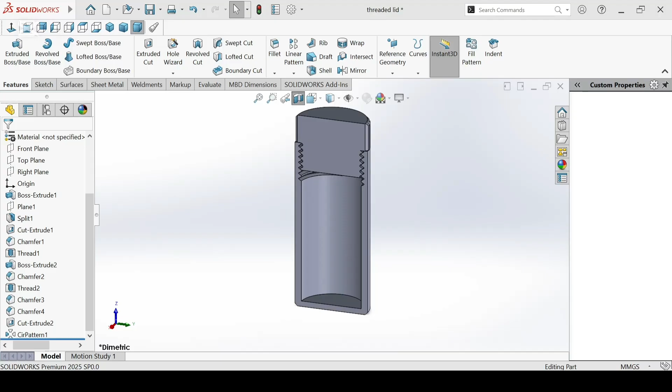In this video, I'm going to take you through a step-by-step process where we're going to design a very simple storage compartment which is cylindrical and it has a lid which you can fasten. So join me as we're going to learn a few things in SolidWorks.

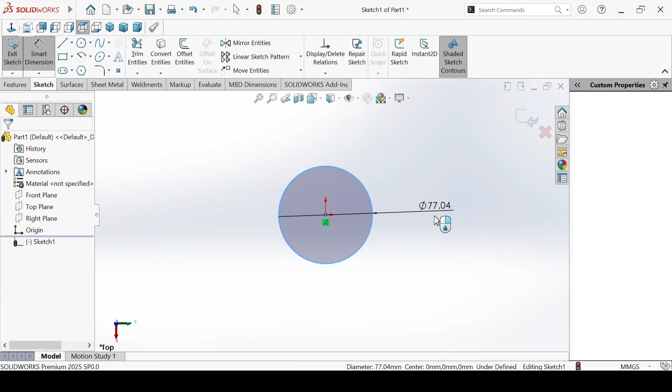So we're going to open a new part and then go to the top plane and start a sketch. Go to the circle tool. Let's make a circle and dimension it 30 millimeters. And then we're going to use extruded boss. I'm going to extrude it for 60 millimeters. Click OK.

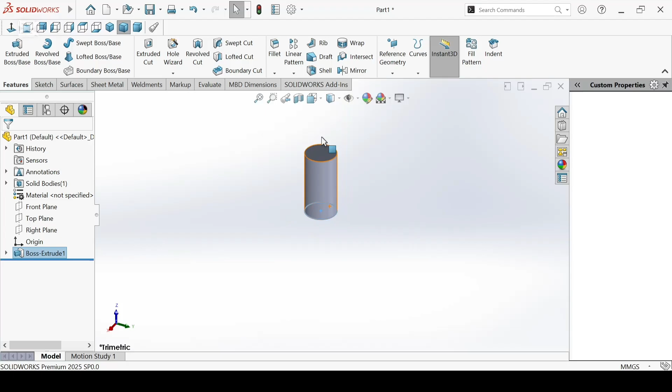And then we're going to go to the reference geometry tab. Select a plane. We're going to make a plane with the topmost part of the cylinder that we just created, 10 millimeters. Flip the offset and then click OK.

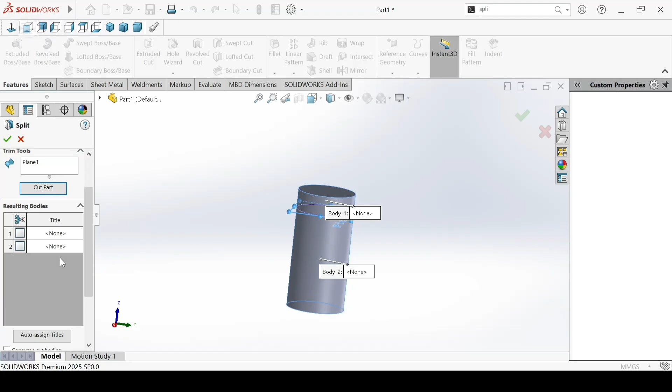So the next step is using this plane to split the cylinder into two parts, the lid and the base compartment. So we're going to use the split feature. Let's go to the command tab, start typing split, and the trim tool is going to be the plane that we just created, and then just click on cut part and then check the two parts that have been created, and without doing any other thing click OK.

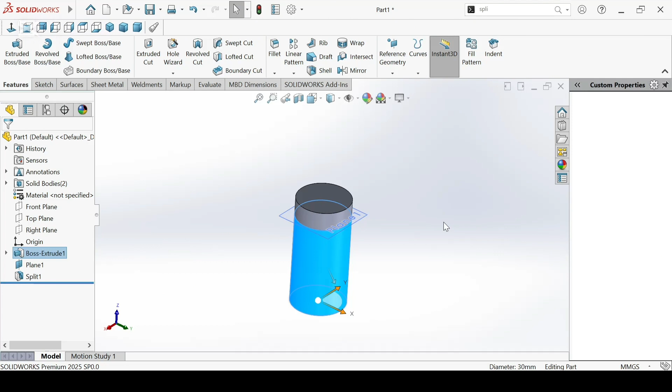So as you can see, we have now two solids. So from here you're going to select the lower solid, right click and then isolate. I'm going to select the top part of the solid, start a sketch, have a circle, and we're going to dimension this circle 23 millimeters.

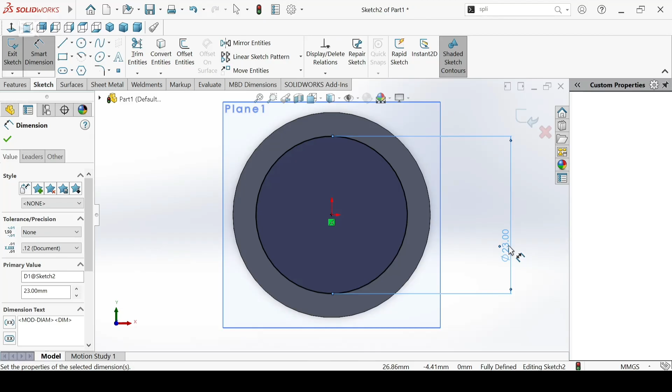So the reason why I've taken 23 millimeters, we are going to use a thread of M24, metric 24, and the drill size for the metric 24 is 22 millimeters. However, we want some allowance for the threads, for the top and the bottom part to fit. So that's why I've taken 23 millimeters.

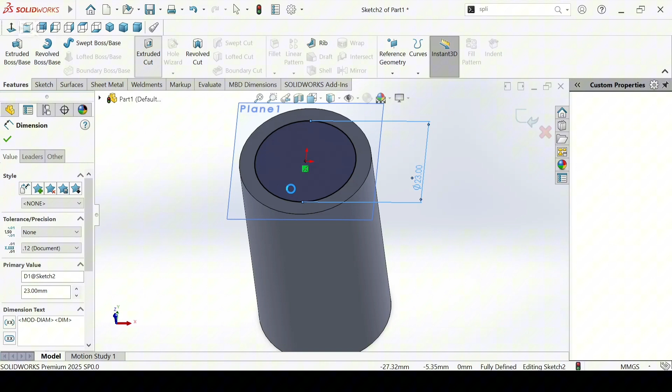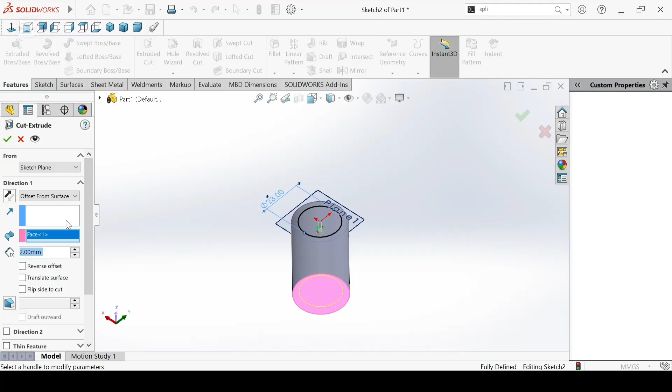So we're going to use this circle and extrude cut it. But for direction 1, we're going to say offset from surface, and the surface that we're going to offset from is this lower surface. Then we're going to offset it 2 millimeters from that surface, and then click OK.

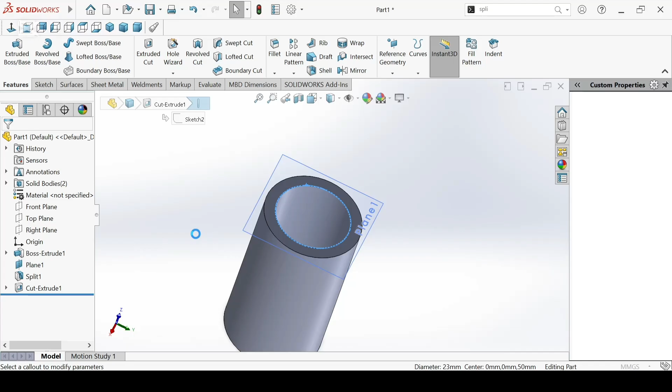So from here we're going to take this top edge and we're going to chamfer it. We're going to give it a chamfer of 0.5 millimeters. And click OK.

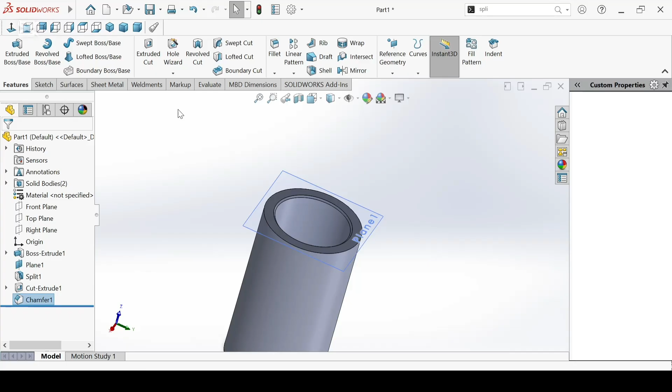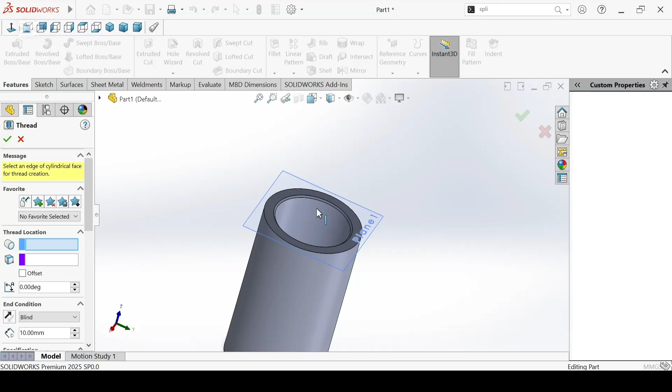So the next part, we're going to make some threads, the M24 threads that we talked about. Go to the hole wizard and then select thread from the drop down menu. So for the first selection, we're going to take that edge, the one at the bottom of the chamfer, and then where we want it to start from, we're going to take the top part of the cylinder.

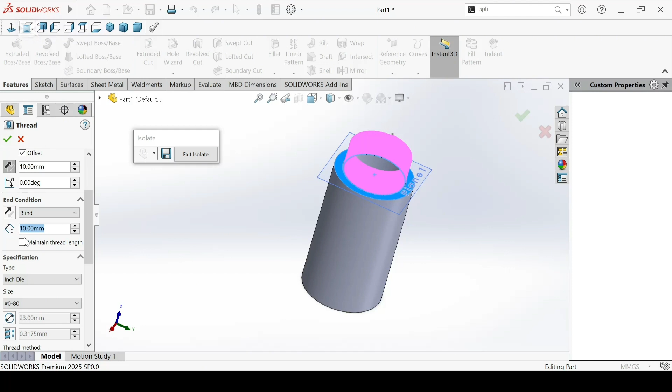So after that, we are going to click on offset because we want the thread to cut all through the cylinder from the top, and then let's just put 10 millimeters and then offset it, so we want it to cut from the top. And then end condition of the thread here, we're going to give it 18 millimeters, and then we're going to use the metric tap. So for the hole we're going to use the tap, and for the plug we're going to use the die.

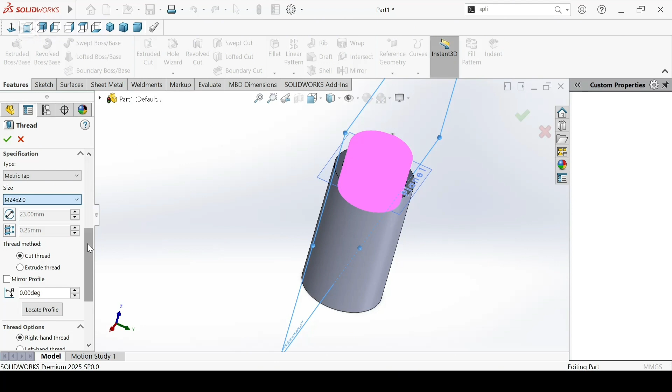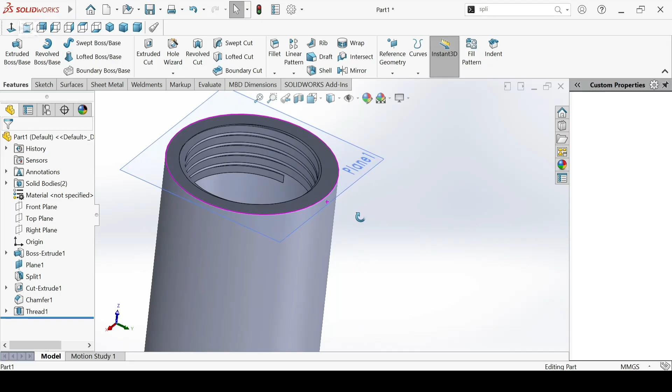So the size, we'll use M24 by 2 millimeters. And then on the thread option you can say trim with the start face. Then we click OK. And as simple as that, we've created some threads. We've cut some threads onto which we can fasten the lid.

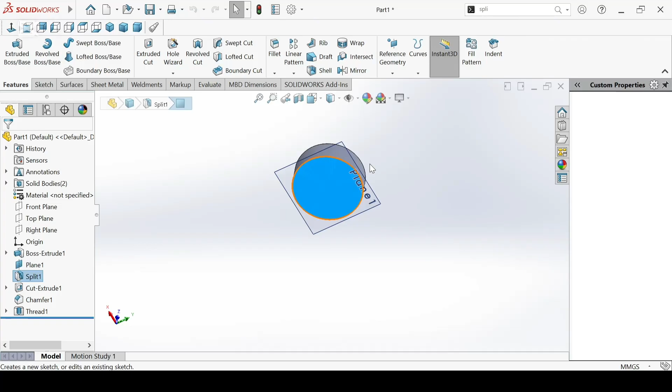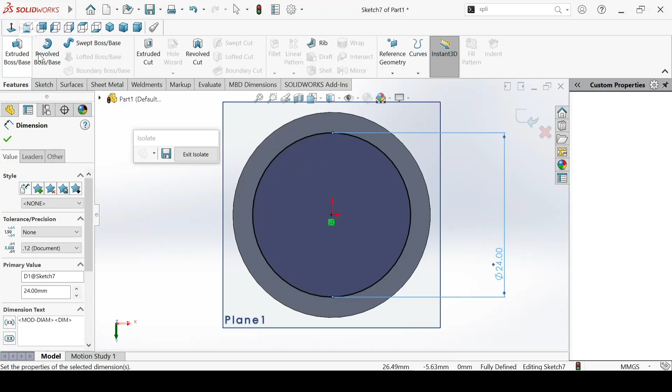So we exit the isolate, and then now we select the top lid and then isolate it. So from here we're going to take that face, and then we're going to make a circle of 24 millimeters diameter. That's 24 millimeters. Then we're going to use the boss extrude and extrude it 10 millimeters.

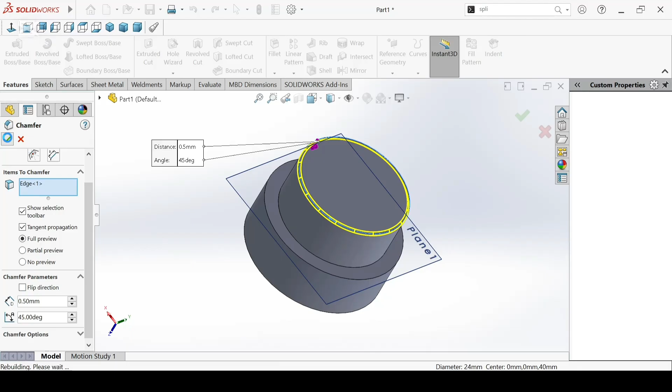Click OK. So we're going to do the same thing where we're going to make the threads, but now on this plug that we just extruded. So we use the chamfer. If you have a chamfer, it aids in the entry of the threads, and it also helps in self-aligning. So as usual, 0.5 millimeters, that's enough.

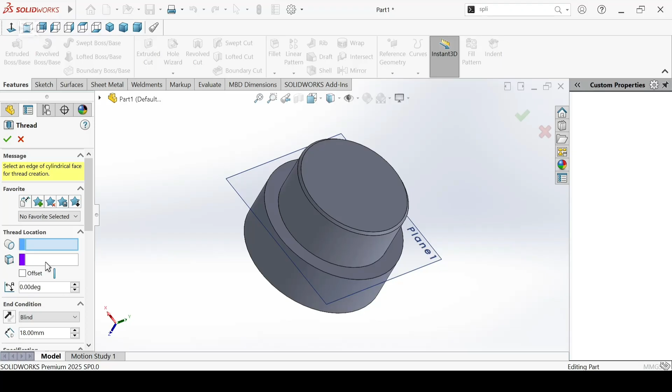Now we go to the drop down menu under the hole wizard, select on thread, then select the bottom part of the chamfer as we did before, and for the start face, select the topmost part. We have an offset of 10 millimeters. Change the direction, and for the end condition use up to selection, and that will be this face here.

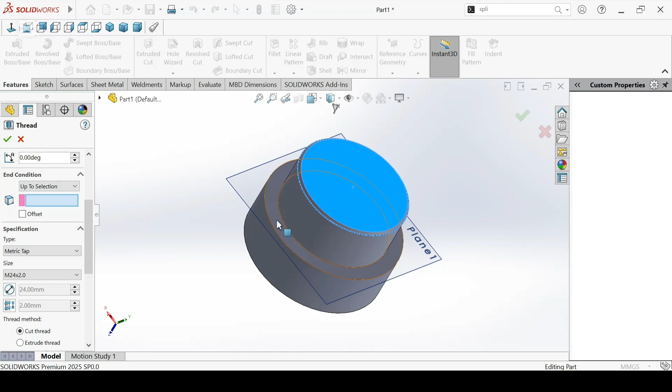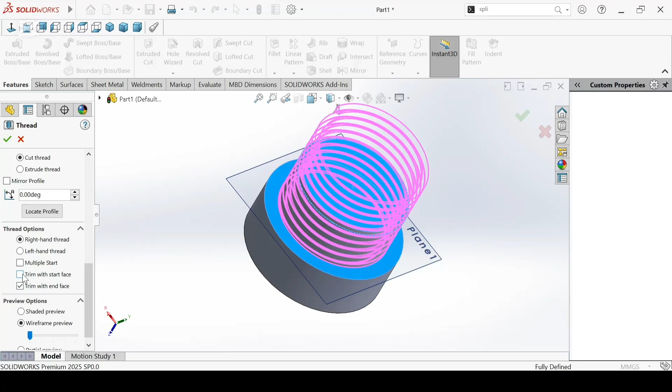And since this one is a plug, we're going to use a metric die. Ensure it's still cut thread. Then we can trim with the end face and the start face, so that we have a neat model right there. After that we click on OK.

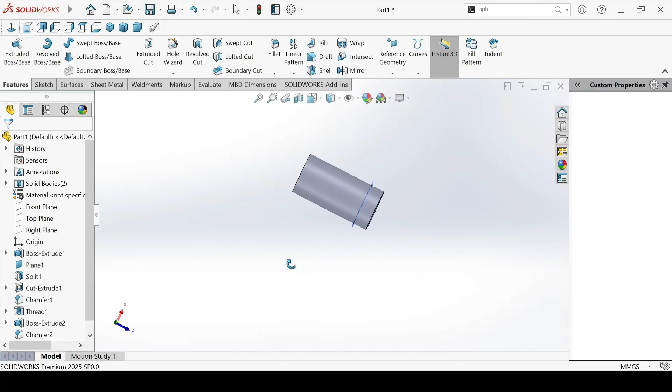If we exit our sketch, you can see we have our container. And if we have a section view using the right plane, you can see that we've made a very good cylinder which has a lid and a base.

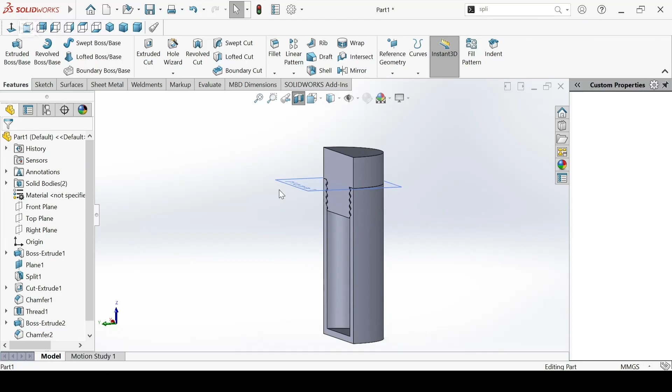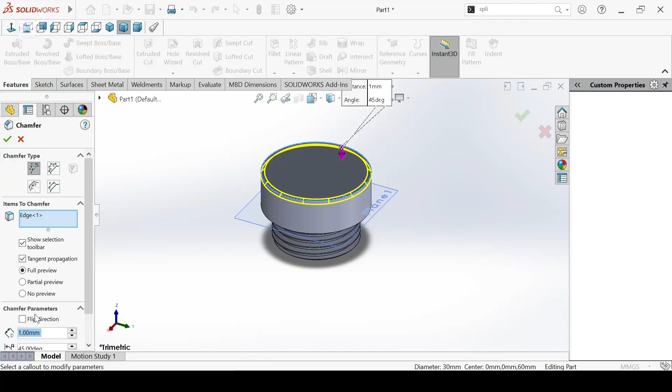So all that remains is giving the top lid some friction surface where you can use it to screw it in or out. So we can isolate the top lid. First of all, we give it an aesthetic chamfer. This time around, make sure the chamfer is 1 millimeter. Click on OK, and then we're going to use the top face of that lid.

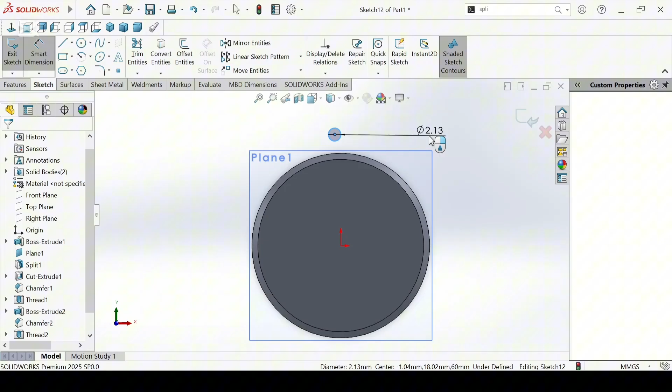Start a sketch on it, select the circle tool, make a circle and dimension it 2 millimeters. Then we're going to take this circle's center point and make it coincident with the outermost circle, rather the edge. And then take the center point of the circle and the origin point and ensure they're vertical.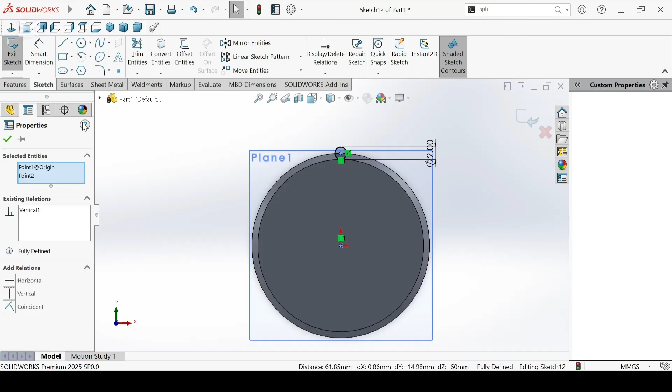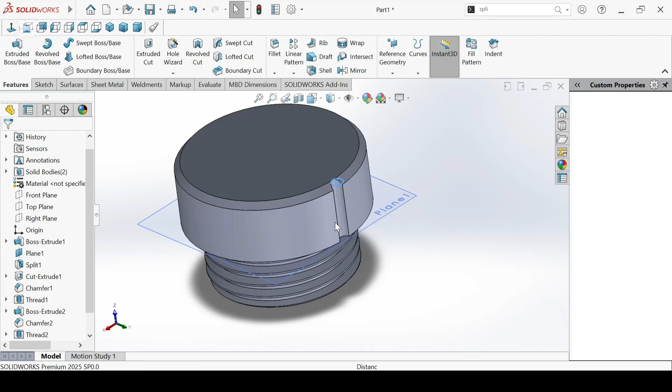After that, we're going to use this circle that we've just created to extrude a cut. We're going to go all through, create that groove, and then we can use the feature that we've just created and propagate it all around this cylinder using the circular pattern. Select the cylindrical surface and give it 24 instances and click on OK.

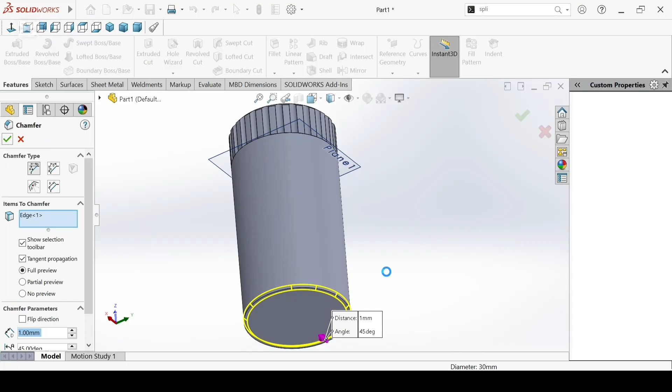So if we exit the isolate, you can see you have a good cylinder here, and the beauty is that you can even chamfer this lower part first for consistency and also just for aesthetics. 1 millimeter is enough. And with that, we have already finished modeling our cylindrical part.

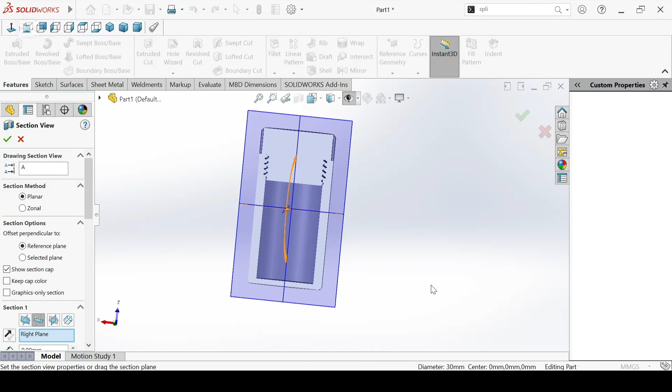If we hide everything else, you can see you have a very good cylindrical part which has threads. You can use it as a storage box. You can use it to pack some few things if you have some spices. You can use this technique to do a variety of things.

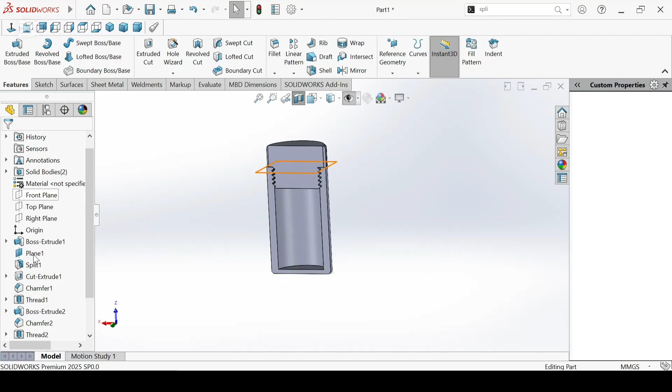The only thing you need to change now is just the size of the plug and the size of the hole, and then you can match it accordingly to the various standards that you can see in the hole wizard. The other thing is that this is also very customizable in terms of length.

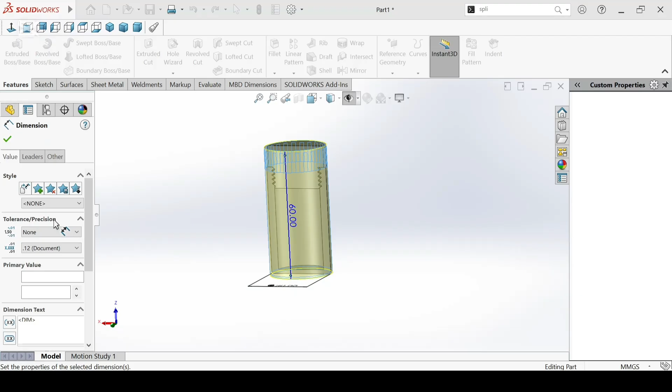So let's say, for example, if you need a larger cylinder or you need more volume inside, you can just select on the extruded boss and change its height from 60 millimeters that we created to around 100 millimeters. Click on OK, and if you rebuild it, you can see you have a very resilient model.

This gives you a larger cylinder, a larger storage box, and I hope you've enjoyed the video.